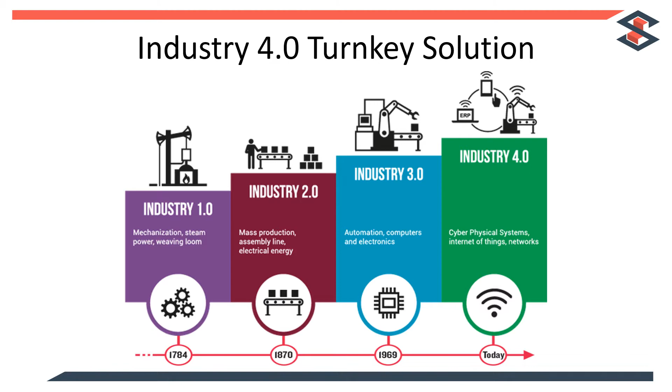ShopFloorConnect is a terrific example of Industry 4.0 connectivity impacting any industrial process. Once the value of downtime is established, our real-time gathering of production data and visibility of that data by management to enable quick and decisive action will quickly become a valuable asset.

The main purpose of ShopFloorConnect is to identify the sources of inefficiency, especially machine downtime. By tracking the specific reasons for downtime, ShopFloorConnect enables you to reduce it. With an absolute minimum of operator involvement or manual data entry, our data collection solution enables you to monitor OEE and machine efficiency.

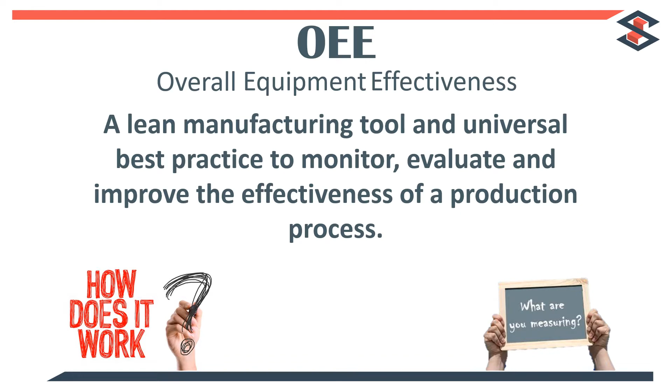OEE, or Overall Equipment Effectiveness. What is this exactly? What is this thing that anyone that tracks process data is talking about? OEE is a well-established method to monitor, evaluate, and improve the effectiveness of any process. But how does it work? What are the metrics? Let's go over some of the basics of OEE. For this, we will use the production process of the Wintriss widget.

To calculate OEE, the metrics you will need to know are availability, performance, and quality in the process. Let's break these down on a quick example of each in a process using our Wintriss widget. Availability is the proportion of planned running time that is available for production.

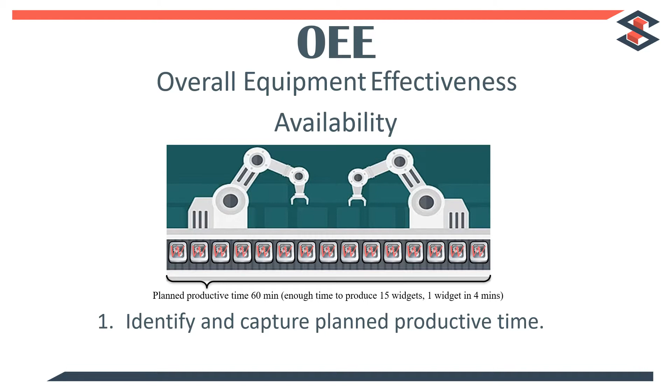We can calculate availability by identifying and capturing planned productive time. This is the sum of your scheduled shifts minus planned shutdowns and lack of demand. Next, you will need to identify and capture your total downtime. Then you can find your runtime by subtracting your downtime from your planned productive time. Lastly, you will calculate your availability percentage by dividing your runtime in minutes by your planned productive time in minutes and multiplying by 100. Our process has an 80% availability.

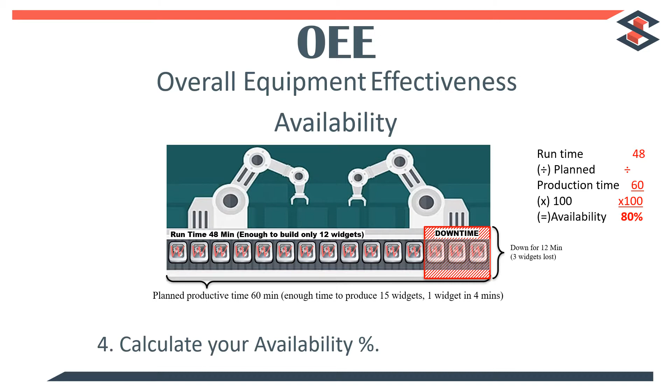The second component of OEE, performance, compares the actual running speed of the machine or equipment against its specified operating speed. The specified run speed is often referred to as maximum demonstrated rate, MDR, or ideal cycle time. Performance is the actual throughput of the process during the time it ran, compared to the maximum throughput that it could have achieved running at the MDR. We categorize performance losses as micro-stops or slow cycles.

In our example, we find our production line is running slow, therefore our performance will be impacted. To calculate the impact to production, we first identify the available time for production, or MDR. Then, we record the actual production achieved. Lastly, we divide our actual throughput by our maximum throughput. This gives us our performance. We then multiply that by 100 to get our performance percentage.

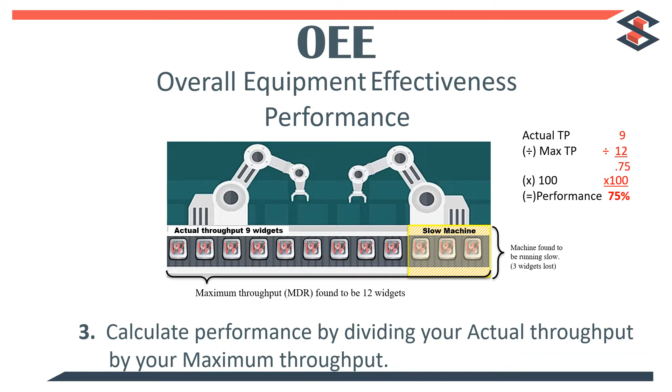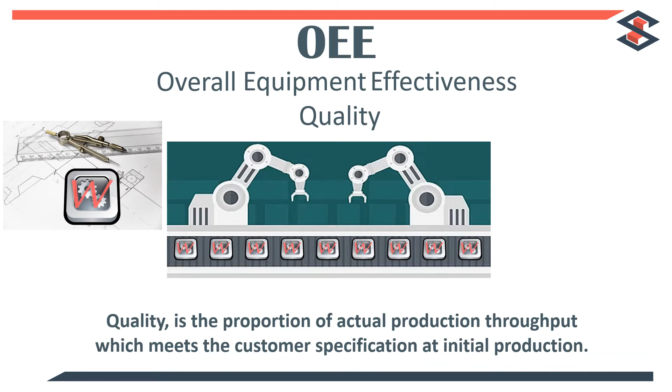The final component of OEE, quality, is simply the proportion of actual production throughput which meets the customer specification exactly and is right the first time. Quality losses usually fall into two categories: production rejects and startup rejects after changeovers, etc. In our example, we found our actual production throughput to be 9 widgets. Quality control has found 2 rejects in the current batch.

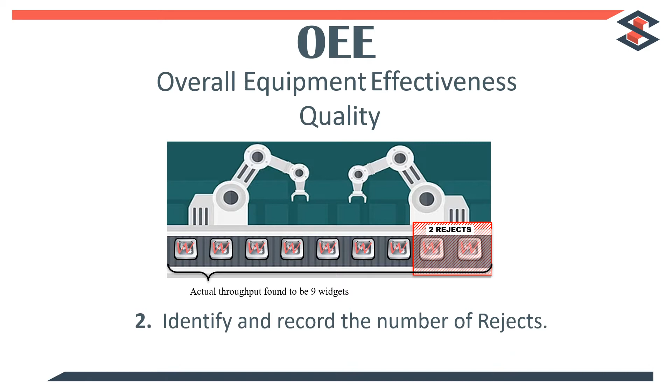To calculate quality, we first record our right first time production. We then divide our right first time production by our actual throughput. This gives us our quality. We then multiply that by 100 to get our quality percentage.

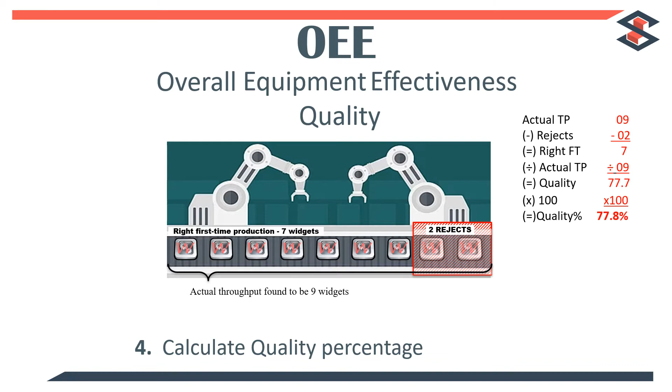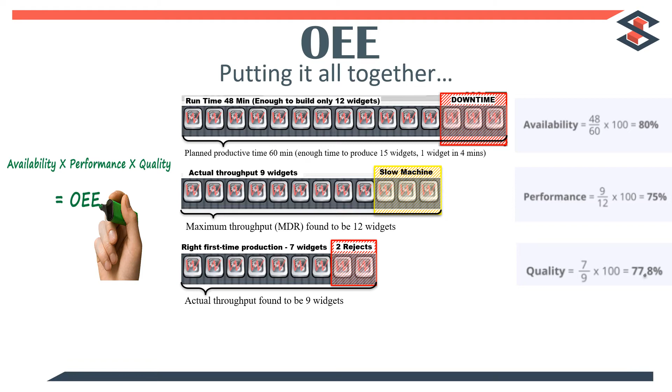Now that we understand all our OEE metrics and have calculated them, let's bring it all together and find out our actual OEE. First, we bring in our availability, which we found to be 80%. Next, we bring in our performance data, which we found to be 75%. And lastly, we bring in our quality percentage, which we found to be 77.8%. To calculate our OEE, we have to multiply all of these together, and we find our OEE to equal 46.7%.

We went from the ability to produce 15 widgets in an hour to only producing 7 good widgets in that hour.

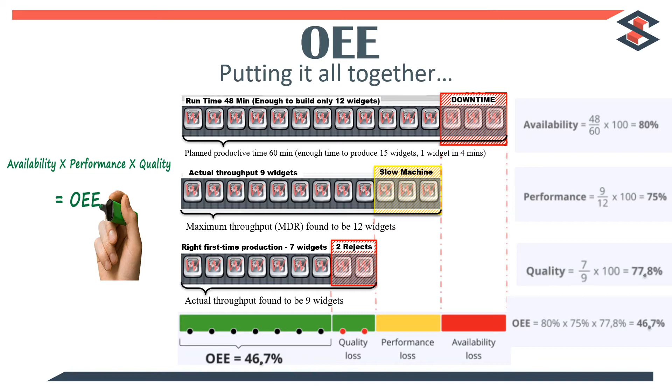For most, this raises the questions: what happened? What went wrong? And for good reason, as we are below half of expected output. By going through the steps of calculating OEE, we were able to identify some of the issues. We found unplanned downtime caused the loss of 3 widgets production time, as well as 3 more were not made due to our machine running slower than it should be. And finally, we lost 2 units to quality control for either defects or bad startups after the downtime perhaps.

This 46.7% OEE number certainly tells us that we have our work cut out for us. But exactly how much work do we have to do? What number should you be targeting? The answer is, the best OEE target for your company is one that steadily and incrementally improves. It is often thought that a world-class OEE score is 85%. The nature of this calculation makes achieving a high OEE score quite challenging. However, you shouldn't fixate on the absolute value of OEE. Instead, focus on your ability to improve your OEE.

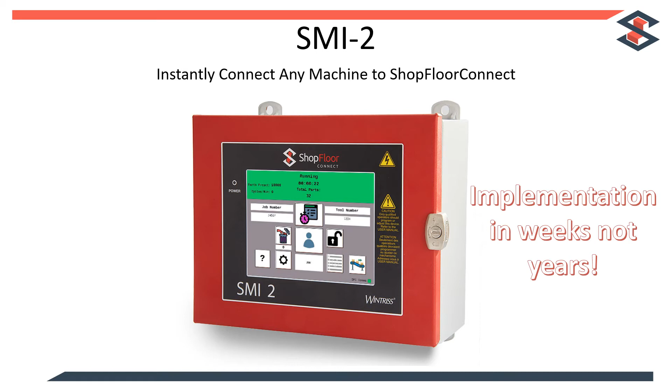This is where ShopFloorConnect and the SMI2 come into play. The SMI2 is a vital part of the ShopFloorConnect machine-focused monitoring system. With just a few simple connections, the SMI2 automatically tracks uptime and production count data from any machine and provides it to ShopFloorConnect. Job and operator information can be entered into the SMI2 using the touchscreen keypad or by the barcode or other scanner connected to one of the SMI2's onboard USB ports. Job tracking enables ShopFloorConnect to apply ideal production rates specific to a part or process, which makes OEE calculations more accurate.

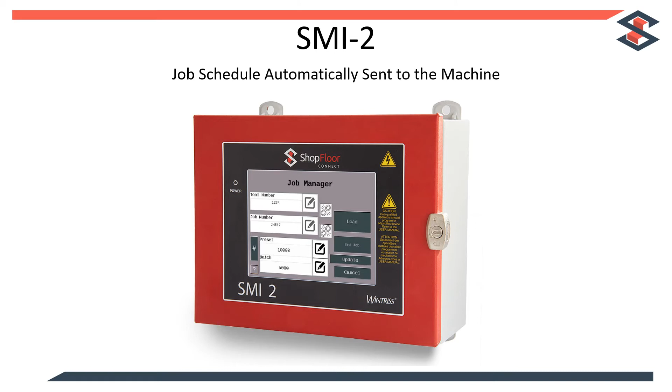The SMI2 features a downtime selection menu that takes full advantage of the touchscreen interface to streamline operator input. The SMI2 also has an additional setup input that allows ShopFloorConnect to appropriately log any time spent doing troubleshooting and setup even if the machine is cycled. ShopFloorConnect is a state-of-the-art shop floor management system that is scalable and flexible. ShopFloorConnect production tracking software comes factory configured to talk to the SMI2 over your existing Ethernet. ShopFloorConnect, with its separate modules, tracks machine uptime, downtime, the reasons for downtime, production rate, and part counts. Running ShopFloorConnect for your shop floor data collection is like having a team of manufacturing engineers doing a detailed efficiency study of the entire factory all the time.

ShopFloorConnect's Factory Viewer displays current machine status and production efficiency in real time on any web browser, including mobile devices. With dashboards like our equipment summary, you can have a real-time view of what is running or not in your entire factory. While our Performance Tracker dashboard provides a single-glance detailed view of each machine's real-time efficiency stats, as well as how long it has been running and who the current operator is. With ShopFloorConnect, you can create and import prioritized job queues for each SMI2. The powerful scheduling engine allows you to calculate estimated times and dates of completion for all jobs in the queue. Partially completed jobs can be automatically inserted back into the schedule, and jobs can be moved from machine to machine as conditions in the factory change.

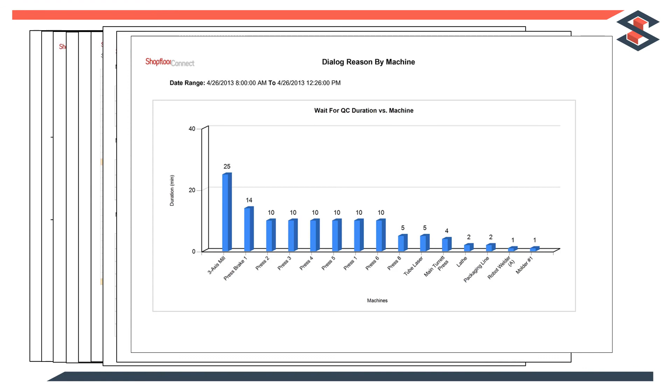ShopFloorConnect production monitoring software has a powerful browser-based reporting feature that allows you to configure and generate reports on demand, or to set up schedules to automatically deliver pre-configured reports. The ShopFloorConnect standard reports are templates that can be customized to contain data from a specific time period, specific machines, operators, part numbers, and/or shifts. These custom reports can be generated in PDF, Excel, Word, and many other file formats and scheduled for automatic delivery to individuals and groups. ShopFloorConnect can send alert messages via email and text if a machine is down longer than a preset time. Simply specify the recipients and the events that will trigger the alerts.

The maintenance tracker can be used to track any preventative maintenance needed on a machine. Users can simply add a new item, name it, and dictate how many run hours, days, or cycles until the PM needs to be done. Maintenance can monitor the percentage column and knows beforehand when maintenance will be coming up due. All maintenance items can trigger a text or email alert when coming up due or overdue to any group or individual. There are also many status reports available for daily and weekly delivery. The tool tracker is for monitoring cycles on stamping press dies for maintenance. There are 3 different counters available for different types of maintenance that can be named and tracked individually. The wrench icon will appear when a tool is coming due for maintenance and display a red dot when overdue.

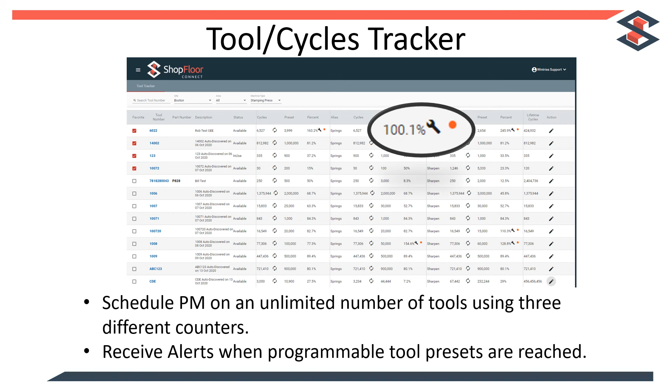ShopFloorConnect has an Application Program Interface (API) for sharing job information with other software. The ShopFloorConnect API is a web service-based two-way communication protocol that enables ShopFloorConnect to receive manufacturing job schedule information such as job and part numbers, the quantity of parts required, due dates, etc. from your ERP or MES software. The API enables your external software to add jobs, update job requirements, cancel jobs, or move jobs from one work center to another. The manufacturing schedule can be updated or even completely replaced by your ERP MES software at any time, in real time.

ShopFloorConnect's main difference from other production tracking software is that it is server-based, with your data being kept on premises. ShopFloorConnect supports multi-plant installations, and its open architecture allows production data exchange with external systems. Perhaps most importantly is ShopFloorConnect's ability to have unlimited users. You control who has access to your server and the level of access for each user, without having to buy any separate licenses for users.